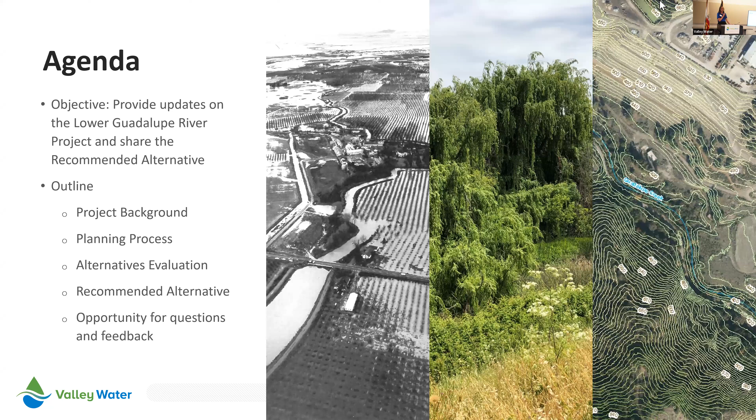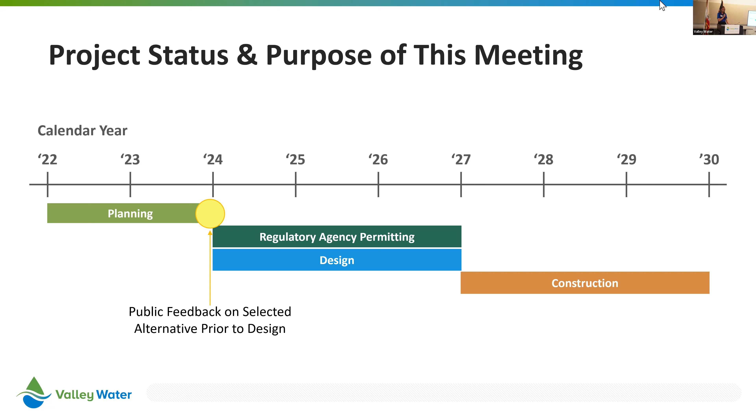Here's where we are in our project timeline currently. We're in the planning phase, but we're towards the end. We've had two previous meetings for this project in the planning phase, and both presentations are available online on our website if you're interested in viewing those. But we're back today at the end of our planning phase to share our recommended alternative and to hear any questions or concerns you may have about the project moving forward.

First, we're going to go into a little bit of project history. The Guadalupe River is in the Guadalupe watershed. There are 7 reservoirs in the upper watershed, 5 of which are owned and operated by Valley Water: Vasona Reservoir, Lexington Reservoir, Guadalupe Reservoir, Almaden Reservoir, and Calero Reservoir. The Guadalupe River itself is 15 miles long, and all of the rain that falls in this watershed ends up in the Guadalupe River.

But because it's so long, we split it up for ease of reference. We have the Upper Guadalupe River, which is Blossom Hill to Interstate 280. Then we refer to the downtown piece, downtown Guadalupe River, between Interstate 280 and Interstate 880. And what we're going to be talking about tonight is the Lower Guadalupe River, which is Interstate 880 to Alviso Slough, which drains to the bay.

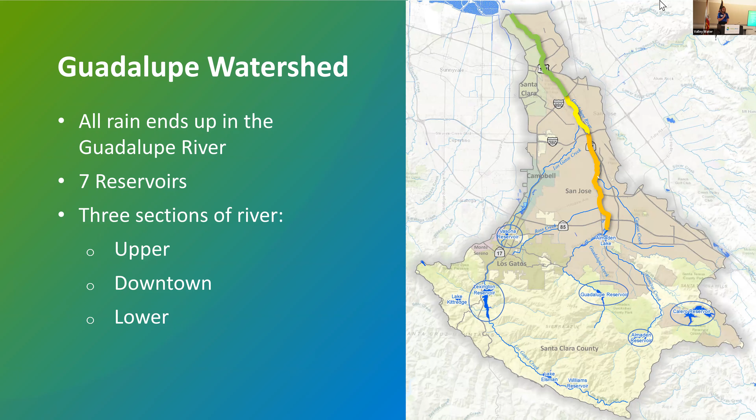The Lower Guadalupe River is 6 miles long. Valley Water completed a flood protection project here in 2004, also called the Lower Guadalupe River Project. It provided 100-year protection in this area, mainly by building levees and flood walls in the light blue area shown here. There were also 3 major bridge improvements constructed in 2004: Skyport Bridge, Highway 101 Bridge, and California State Route 237 Bridge.

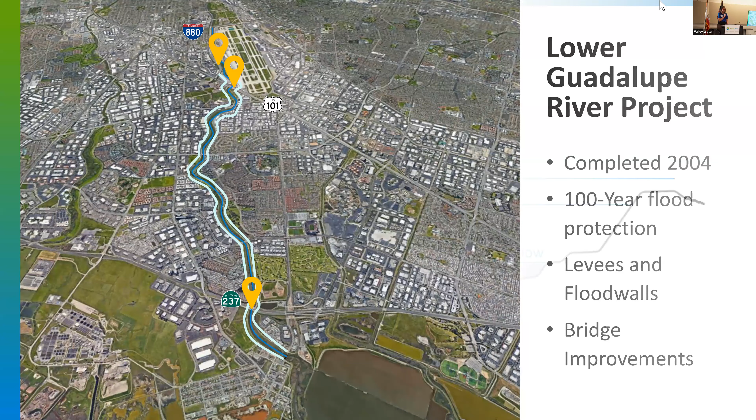The problem now is that we're finding the river in this area has insufficient capacity. We discovered this through recent high water marks that we take routinely after large storms. We put this into our models and noticed the water surface elevation we're observing in the field was higher than we were predicting. So we did some updates and found that the design condition is contained within the channel with a little bit of a factor of safety, while the current condition is spilling over in certain areas.

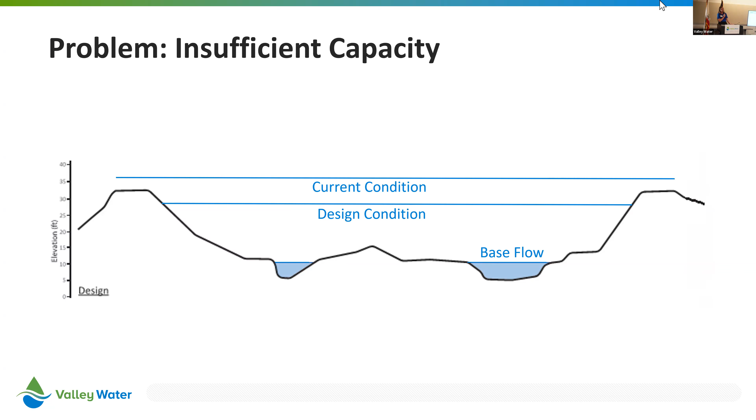There are several reasons why this occurred, but the main reason is that there's much more vegetation in the channel than was previously intended, even with the regular vegetation maintenance we do routinely. This is an example showing the current condition versus what the design condition was accounting for, in the most vegetated reach between Montague Expressway and Trimble Road.

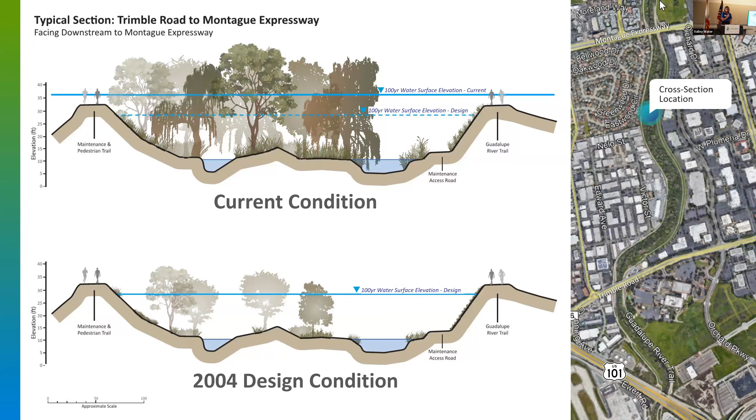So I'm just going to take a break briefly to talk about preparations that we're doing in the meantime while this project is going through design and construction. There are certain things we're doing to account for this and help in the meantime.

Valley Water staff went in and removed some vegetation from the levees and 15 feet into the channel to help with capacity over 2 summers. We also did some sediment removal in the channel to help with flow capacity.

We also lowered Lexington Reservoir to 70 to 75% of capacity, and this allows for more storage in the reservoir if the area receives a large storm.

Valley Water also has a robust storm preparedness system, which we use every storm season. We have field information teams, and we closely coordinate with the cities of San Jose and Santa Clara during storm events. We also have emergency action plans in place.

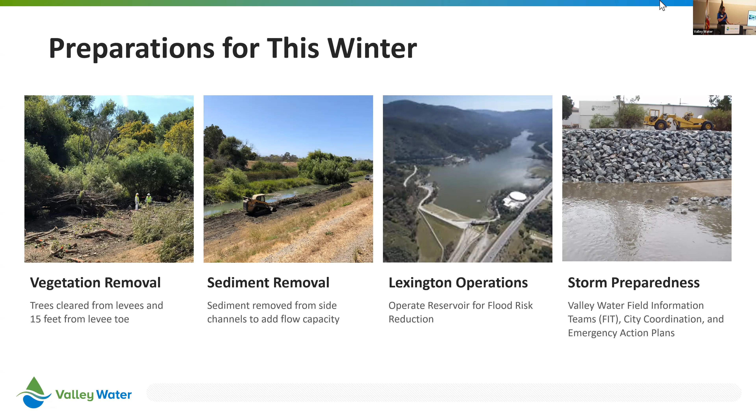Our objectives for this project moving into the planning phase: our main objective was to restore the level of service to the channel. We also had secondary objectives, which were to minimize the need for future operations and maintenance activities, to maintain and enhance public recreation and access, and to obtain community support and participation for this project.

For design criteria, there were a couple of things we considered. Hydraulics and hydrology is how much flow is in the channel, so we were looking at the 1% flow capacity, or more commonly referred to as the 100 year flow.

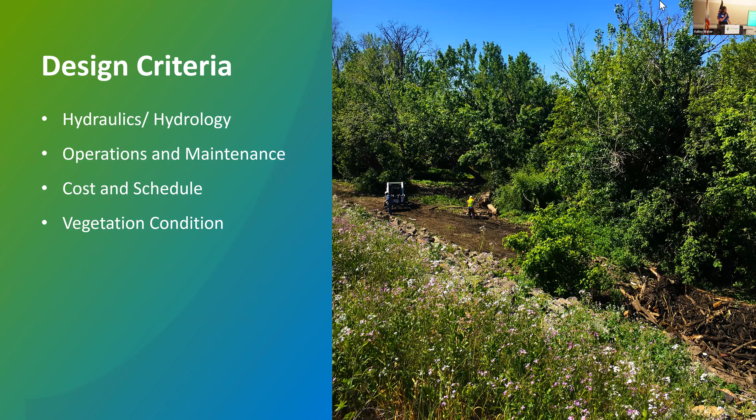For operations and maintenance, we wanted a sustainable condition moving forward. We also considered cost and schedule - we were given around 80 million to try to meet and build as soon as possible, since this is a capacity restoration project.

For vegetation condition, this is something we spent a lot of time considering before moving forward, because we really wanted to create a vegetation condition that was sustainable moving forward. We worked with our operations and maintenance team and our vegetation field operators to make sure we could keep a level of vegetation in the channel that was sustainable, so we wouldn't need to work super hard to remove it, for environmental benefit, and so we don't have to come back here later with the same issues. So it ends up being a similar level of maintenance that is done now.

Now that we've defined our problem, I'm going to talk a little bit about our planning process. Valley Water's planning process starts with problem definition, which is what I just covered - defining what we think the problem is and what the objectives are that we're going to solve for.

Then we move into an iterative planning and design cycle where we start with conceptual alternatives, then analyze and refine alternatives, develop a report, and seek public feedback. Then we move into feasible alternatives, repeat that cycle, and move into the staff recommended alternative phase, repeat the cycle, and ultimately come up with the final project that we recommend to design.

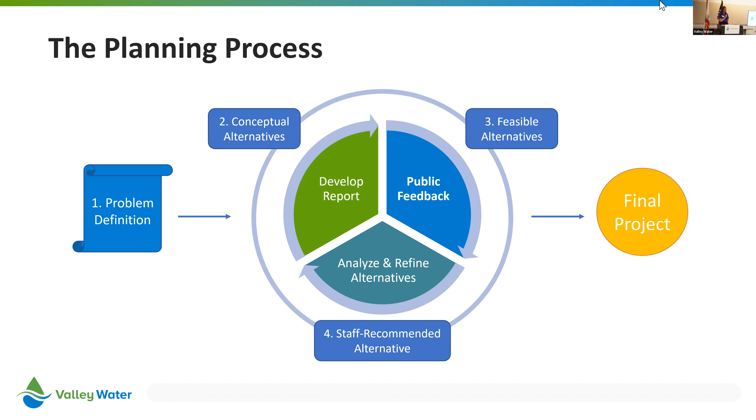We started with conceptual alternatives. Those are high level, where we try to identify anything within the realm of possibility that could solve this problem. It's represented in this upside down pyramid as the largest part of our planning phase, where we identify as many things as possible. Ultimately, we identified 19 different alternatives as part of this process.

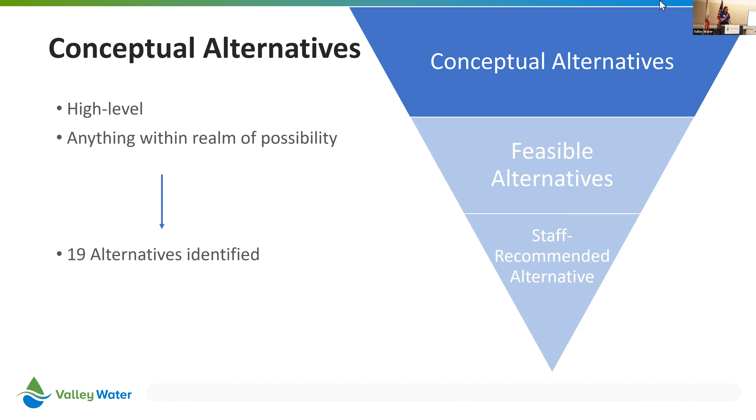There are three main groups of ways that we try to reduce flood risk. The first one is by reducing high flows through creating a large open space to hold floodwater, or a large bypass or culverts. Both of those ultimately result in less water in the channel.

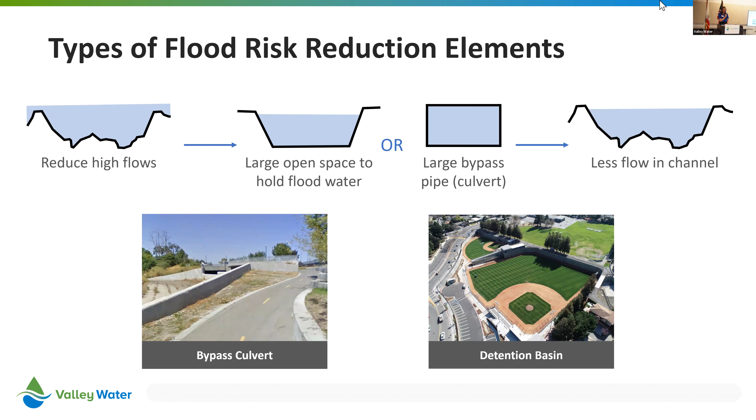Some ways we do this: this example here is the bypass culvert in downtown Guadalupe River. We also have this example of a detention basin, which would hold water - this picture is from McKelvey Park. It's a bonus that these detention basins can also be used as multi-use facilities.

The second way we can reduce flood risk is by changing the geometry of the channel to carry more flow. We could either make the channel taller or wider. Some ways we typically do this are flood walls or levees, raising their height, head walls at bridges, or passive barriers, which are a less intrusive and less visible type of flood wall.

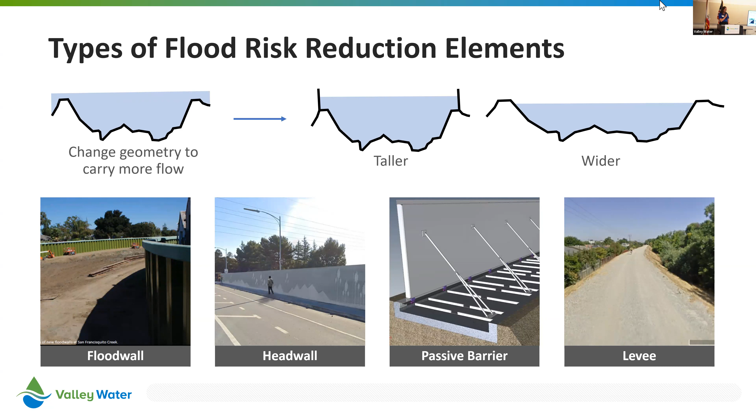We also looked at widening, but it did end up being difficult in a heavily urbanized area.

The last way we look at reducing flood risk is by reducing roughness, which is determined by rocks, plants, and trees in the channel. All of that takes up space and slows down water in the channel, so you can make it smoother by removing some of it, and then the water flows faster and the water surface elevation is less. Some ways we could do that are vegetation removal or concrete paving, making the channel smoother.

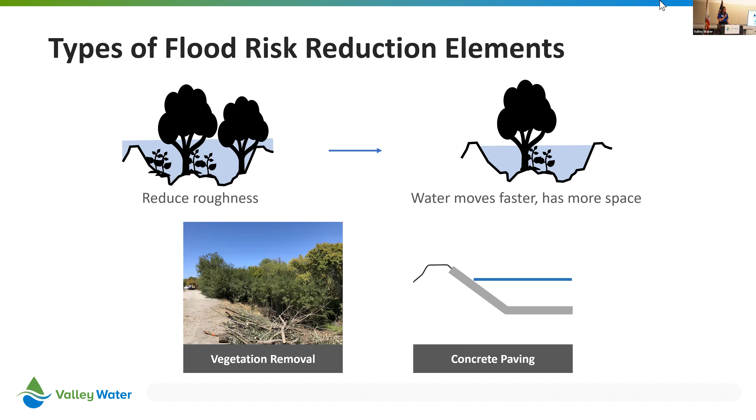So ultimately, all of those types of things were identified as alternatives conceptually, but we had to screen them to make sure that they were actually feasible before we spent a lot more time developing those alternatives.

We put all of those through what we called our level 1 screening process, where we ask questions like: does the alternative meet the project objectives? Is it within the cost range we were given? Is it technically feasible, meaning can it be constructed with current construction methods? And is right-of-way property available if we needed it?

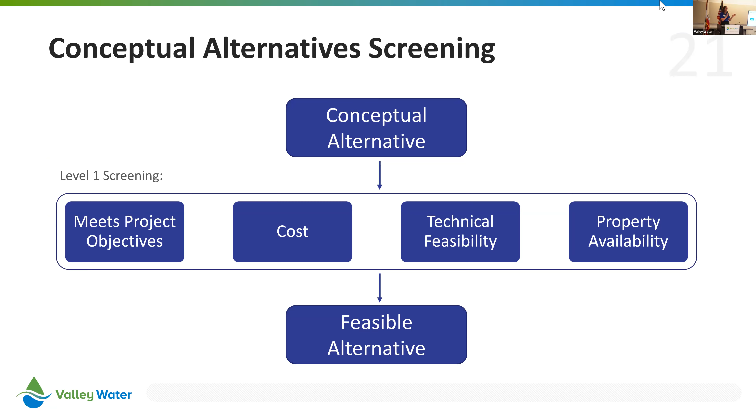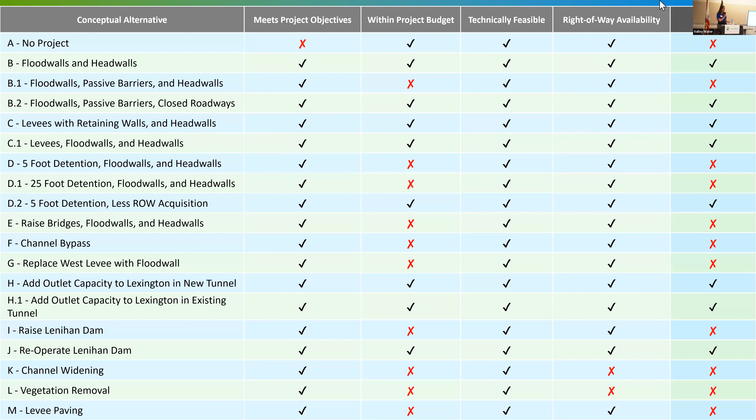Any alternative that met all of those requirements moved through to our feasible phase, where we spent a bit more time developing and looking at it. Here's an example of all the ones that went through our screening process. Ultimately, there were 8 that were identified as feasible alternatives.

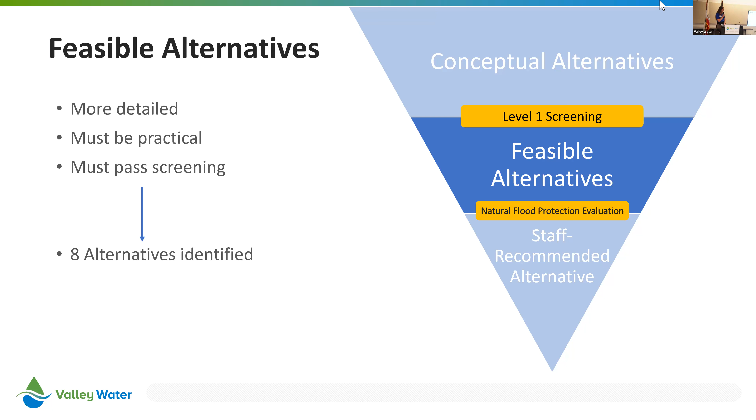So we're in our next phase, feasible alternatives. They've gone through their level 1 screening. At this point, we want them to be more detailed, practical, and to actually meet the project objectives. Ultimately, we had 8 that we identified during this time.

Here are the ones we identified to continue looking into. The first is no project, which we're required to keep in as a comparison. Then flood walls and head walls at bridges, or similarly, flood walls with closing bridges. We looked at raising levees, a combo of flood walls and levees, detention basins, and a couple of Lexington flow detention alternatives, either upsizing the outlet or reoperation.

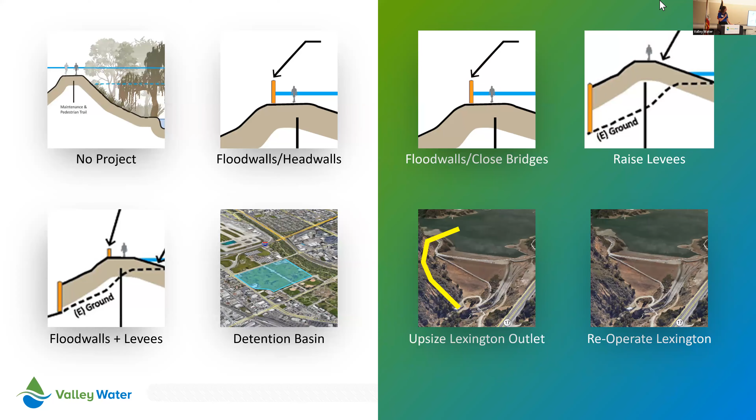I did want to briefly talk about why we did not choose to look at removing vegetation, because it does seem like a promising solution. But when we looked more into it, we found the scale of vegetation we'd need to remove is very high, around 2,000 trees. To do that type of removal is a huge effort and requires a lot of mitigation, which requires a lot of land for us to purchase to plant. This project ended up being potentially much more expensive than our budget allowed. Also, it's not a very sustainable solution, because plants grow really well in the Guadalupe River, and we'd like to go with a more sustainable solution.

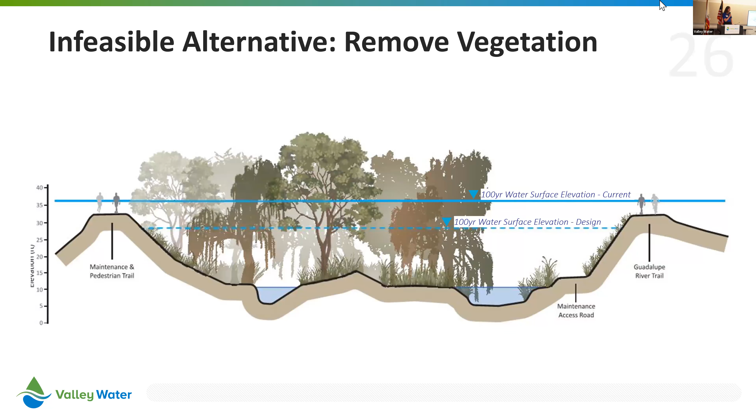Once we developed the feasible alternatives a bit more, we had to evaluate which one would be the best. Valley Water does this through our natural flood protection evaluation process, where we evaluate each alternative based on 10 different objectives. I've condensed them down into about 5 categories here for ease of communication.

We look at things like: does this feasible alternative still meet the project objectives? There were some that didn't once we looked closer. We looked at whether maintenance is sustainable, at cost, at ecological benefits, and at community benefits when we evaluate the alternatives. Ultimately, what emerges at the end of this process is not necessarily the cheapest project, but the one that balances cost with environmental and social benefits.

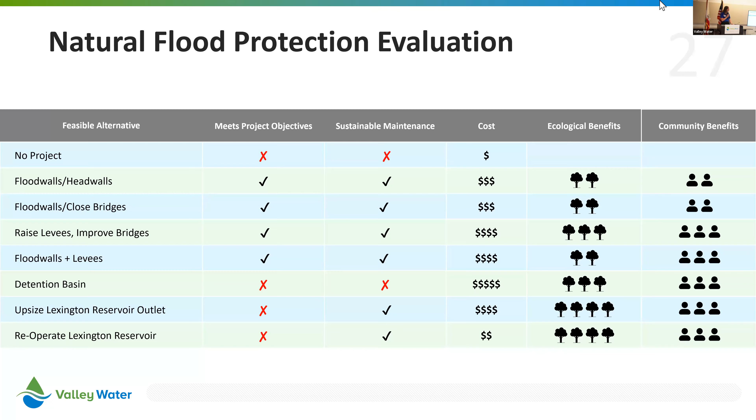And so ultimately, the alternative that came out the best from that alternatives evaluation was our recommended alternative, which is to raise levees and improve bridges.

In this image, the green and blue lines show the extent of the project levee raising. Darker is lower levels of levee raising, lighter is higher. It ends up being around 1 to 3 feet average. The project extends between Highway 101 and 237, with potential bridge impacts on 4 bridges.

Airport Parkway, Highway 101, Trimble Road, and Montague Expressway. For the cross section on the bottom, you can see the levees will be raised on the outboard side, which helps us preserve capacity as much as possible, as well as visibility into the channel for anyone walking along the trails on top. Also, there would be retaining walls on Valley Water's property lines to help contain that levee raise to our property.

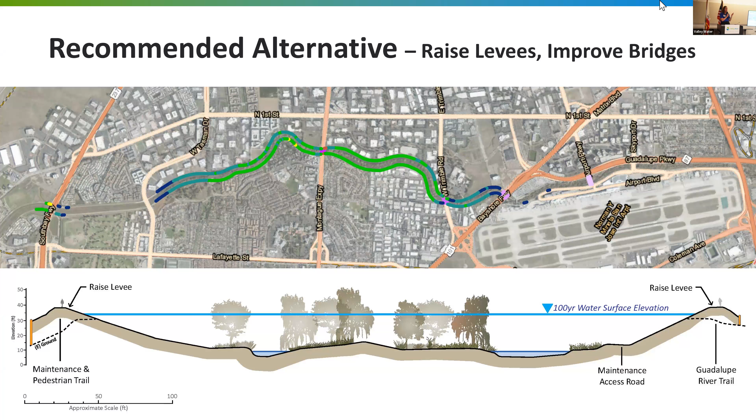These are some representative photos of what we think it would look like ultimately at the end. For the levee, it would be raising on average 1 to 3 feet in most areas. The trails would be relocated to the top of the new levee surface. And then ultimately there would be head walls at the bridges that needed those modifications.

Those would be anywhere from 4 to 7 feet total height, or around 1 to 4 feet increased height. Additional bridge modifications would also need to be done at those locations to structurally accommodate the higher head walls and the higher hydraulic forces.

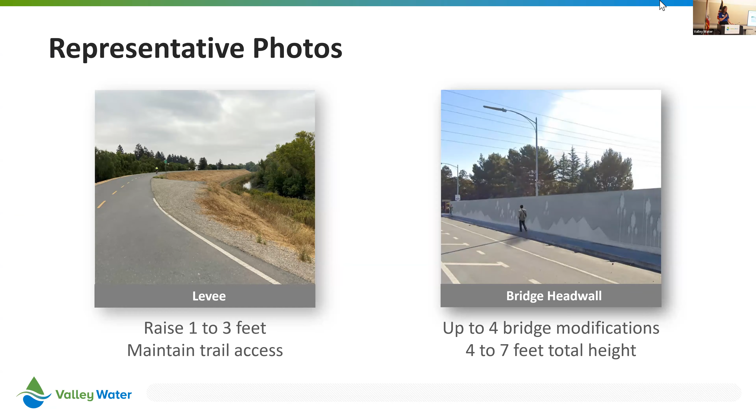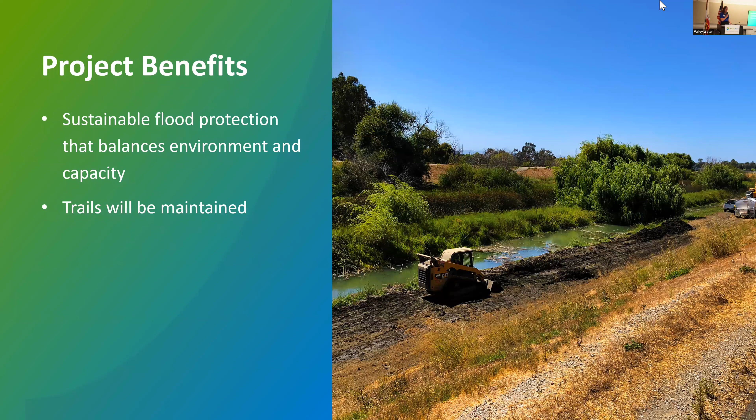So just to reiterate some project benefits, why we're really excited about this project: this alternative ultimately gives us a sustainable flood protection solution that balances environment as well as flood capacity. And also, the public access and trails would be maintained.

From here, staff will be transitioning this project to the design phase. We expect that design phase to last from 2024 to 2027. During that time, we also do environmental permitting. Construction would also be around 3 years, so ultimately from 2027 to 2030. We will plan to periodically provide public updates throughout that whole process.

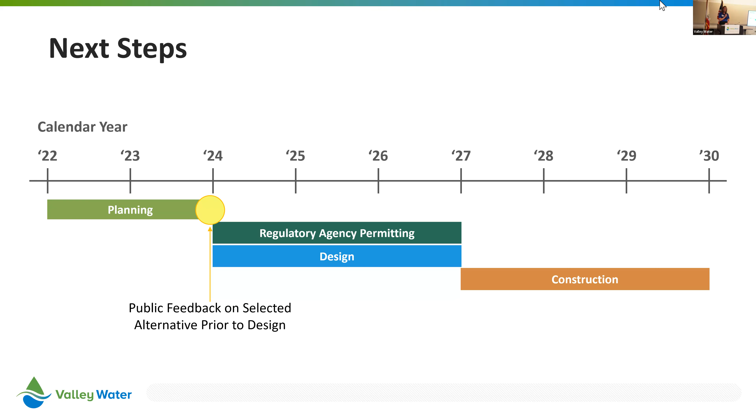And so now I'm ready to take any questions that you might have about the presentation or anything else.